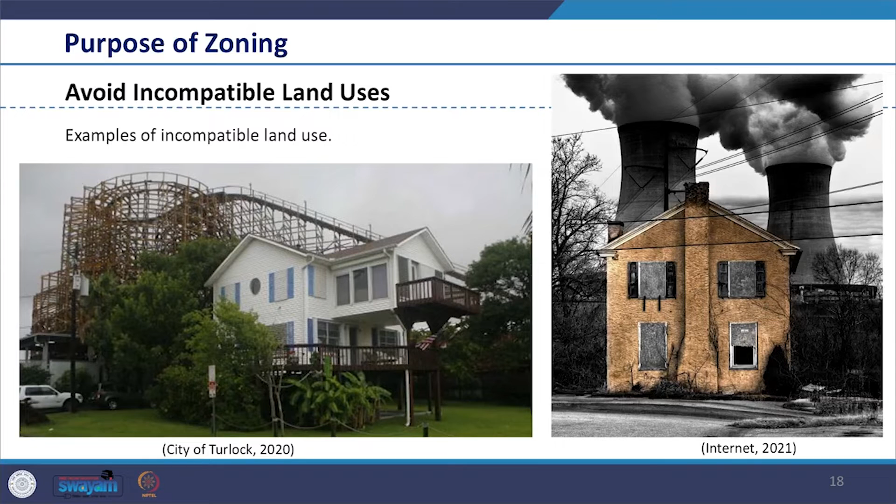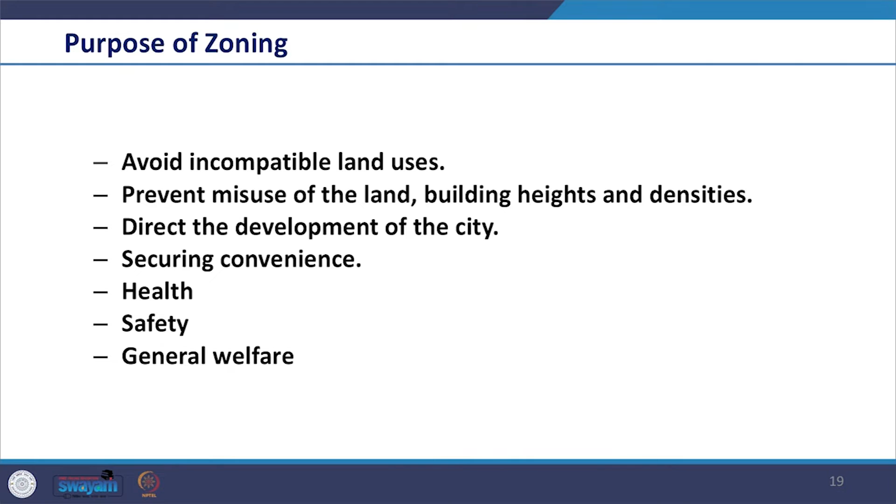Looking at the broader purpose of zoning: it is to avoid incompatible land uses coming together, prevent misuse of the land, determine building heights and density, give direction to the development of the city, and secure convenience, health, safety, and the general welfare of the people.

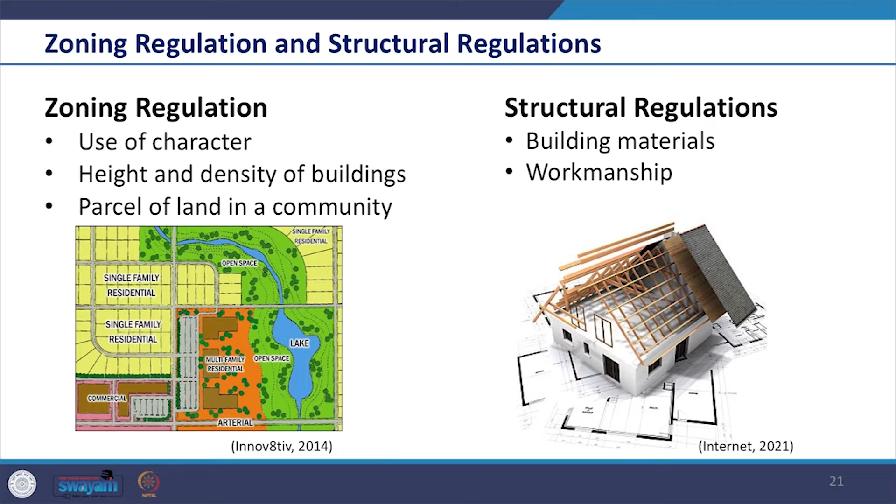Looking at the difference between zoning regulation and structural regulation: zoning regulations are meant for the use, character, height, and density of buildings, and they prescribe how each parcel, meaning the plot of land in a community or city, may be put to use. Whereas structural regulations impose restrictions on the building materials, going further into details into the building materials and workmanship in the form of specifications of the work.

Looking into the power of zoning, how it is executed: zoning power is executed through the process of approval of plans for the proposed use and structure, and by means of site supervision. So that is how, through the approval system and supervision system, we execute our zoning power.

Looking at the aspects of zoning, zoning is related to three main aspects: one is density zoning, height zoning, and the third one being use zoning.

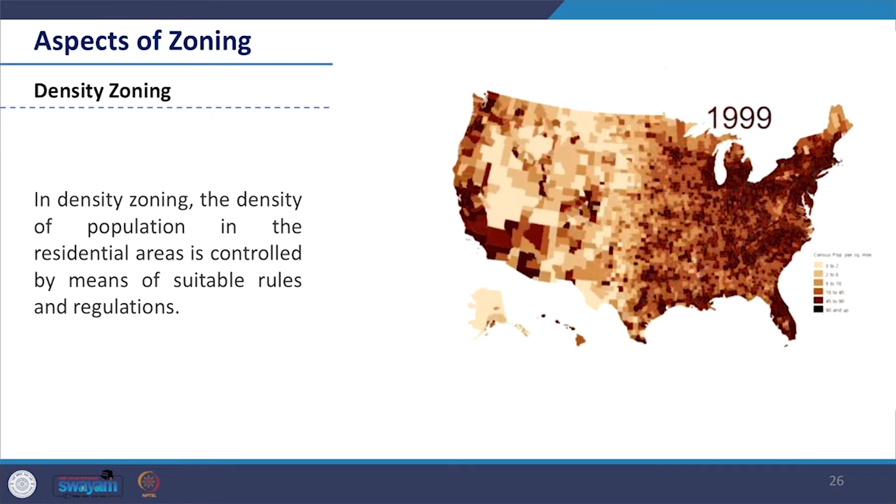In density zoning, the density of population in the residential area is controlled by means of suitable rules and regulations, whereas in height zoning, the aim is at controlling the height of the buildings with due consideration of the content of the buildings and the street width, and the marginal open spaces for the provision of light and ventilation.

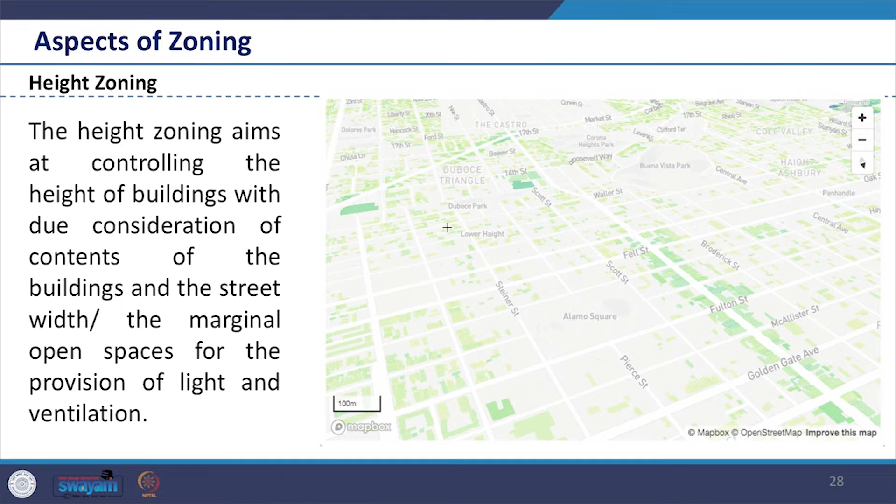Whereas use zoning, which is one of the most important aspects of zoning, it defines the use of various parts of the town, such as whether the use can be residential, commercial, industrial, recreational or special area.

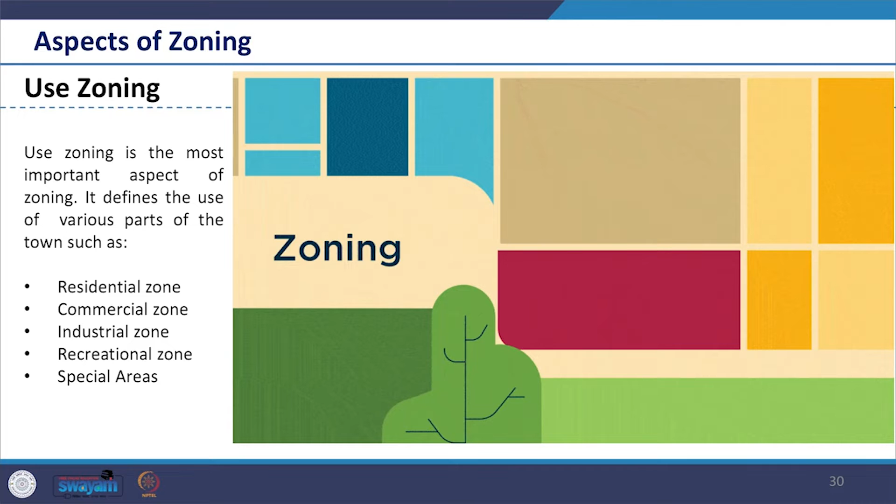So we have seen different aspects of zoning. Now we look at different kinds of zones. Overall, there could be 43 use zones at the development plan level within 10 land use categories at the perspective level. Permissibility could be decided by the town planner depending upon the requirement and feasibility.

So now looking at the principles of zoning. The key principles which need to be considered are: one, to provide functional distribution of work centers and living areas, optimize the travel distance - you see how much we travel these days - and to increase efficient functioning of the activities.

Further, to promote economic development - the whole intention of the urban area is for economic development - for all sectors of the economy by providing more economic space and efficiency. To preserve sensitive areas, at the same time to look after forests, parks, sensitive natural resources, heritage areas and water bodies and so on. Further, to rehabilitate and improve the quality of life for the residents.

So likewise, we also look at securing health and safety by segregating hazardous industrial uses. You may also see this in the example which will follow. Further, to segregate nuisance areas or special uses such as logistics, warehouses, wholesale, airport, etc.

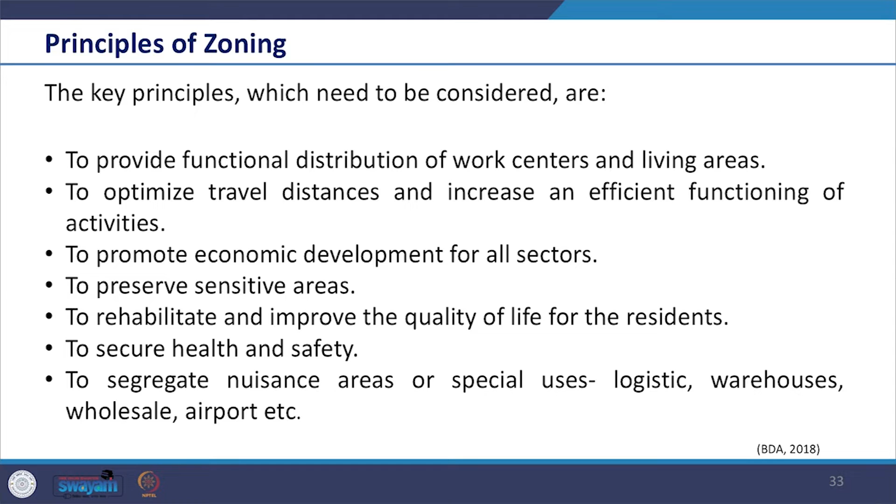So now we're going to look at and try to understand all these things through the case of the Draft Bhopal Development Plan 2031, and we'll particularly look into Volume 3. We will try to understand different zoning aspects and the kind of control exerted through the process and how it guides developments. We have taken this example because you have already seen the analysis as well as the proposal vision of the city, so it will be easier for you to comprehend how we are translating that here.

So just to briefly refresh the problems which we had seen in Bhopal through the draft Bhopal Development Plan - we're not covering all of them, just picking a few - like the challenge of conserving urban forests, water bodies and built heritage, as well as the presence of low density areas, FAR and ground coverage, and the observation about a lot of commercial activities coming into residential areas, and mixed land use activities seen more in the residential area. Likewise, they observed lack of industrial activities, as well as observations about haphazard diversion of land and growth of illegal colonies.

So in order to address many of such kinds of problems, the zoning plan was created in the proposal. In the proposed land use plan of Bhopal city, we see that different use zones are identified. Use zoning is very important as it defines the use to which various parts of the town will be put.

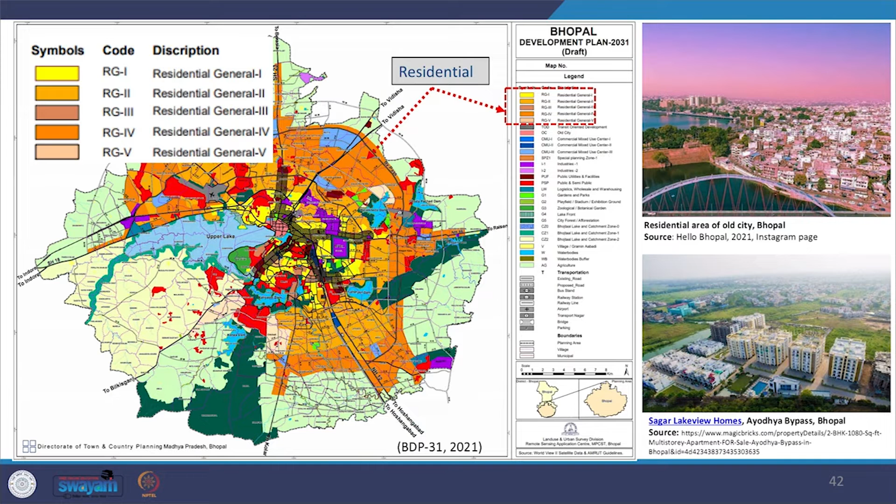Likewise, zone 4 is delineated for the purpose of urban expansion of the city, and zone 5 is delineated for low density, to maintain and preserve the ecologically sensitive ecology of the city of Bhopal. So we see that by use zoning, different conditions and intentions are addressed even within the residential category.

We learned about TOD in our class as an encouraged trend in planning for efficiency and for environmental and economic concern. We see here how TOD is translated into the land use zone. In the map, you can see transit-oriented development, TOD, shown in brown grid along the prime movement corridors.

Transit-oriented development zone is delineated as an overlay along phase 1 of the metro in this particular city. The purpose of the zone is to allow more people to live and work near the metro corridor. This zone is made up of existing older structures which shall be incentivized to redevelop with higher FAR, undertaken preferably through the local area plans.

So you may also integrate, think about the local area plan we studied about. Local area plans will be prepared to ensure that the plot is utilized properly and efficiently through merger or amalgamation, and it addresses the widening of roads, allows parking management, and also allows pedestrianization in this particular zone.

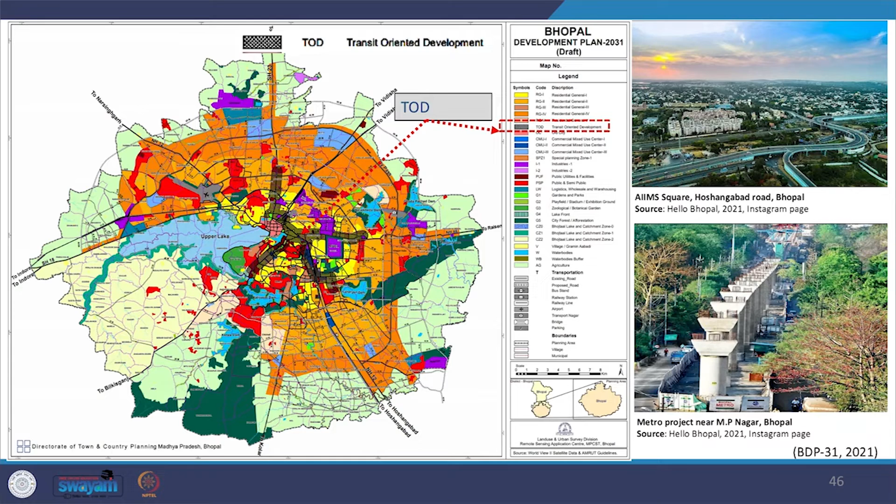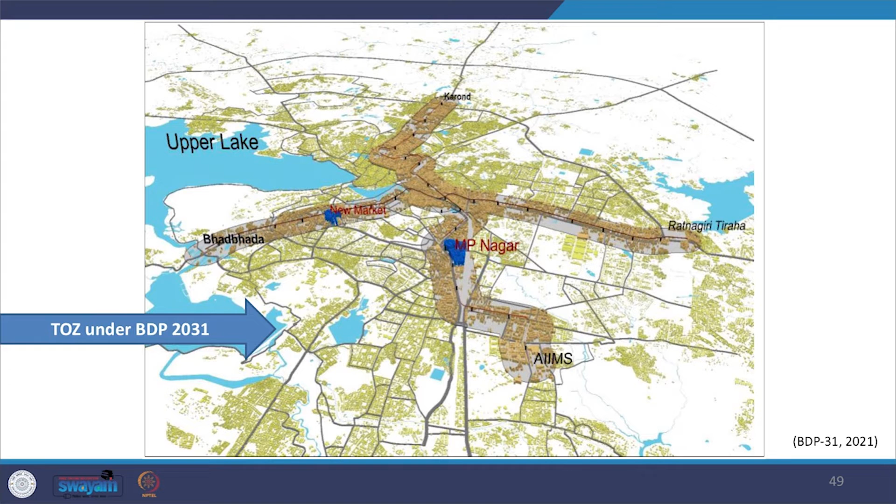The zone has been delineated 500 meters on either side of the metro alignment. Principally, all plots falling completely or partially within this 500-meter buffer from the metro alignment shall be included in TOD. The purpose of this zone is to allow and enable more people to live and work near the metro corridor. So you can see how it has been done here.

In order to promote compact TOD in the city and to integrate land use and transportation interface, this concept is introduced. So the transit-oriented zone is an effective tool to promote compact, transit-oriented development within the walking distance of public transit nodes such as BRTS and MRTS stations.

Sustainable transit-oriented densification is planned to be achieved through TDR. That's the plan proposed by the draft Bhopal Development Plan. The transit-oriented zone is identified as a 500-meter buffer distance on either side of metro line 1 and 2, as you had seen in the map.

It is anticipated that the TOZ, transit-oriented zone, will induce people to prefer to use public transit, providing housing, employment, entertainment, and civic functions within walking distance of the transit nodes. It is anticipated that it will encourage residents and workers to drive their cars less and ride public transit more often.

So we see that Bhopal Development Plan specifies permissible FAR. FAR is a means to control the density. There's also an aspect of density zoning.

Here you can see in the TOZ, higher FAR is being offered, higher than the residential area. So here you see it's 3 FAR permissible, whereas for residential it was 2. You may also reconnect your thoughts to the types and levels of plans.

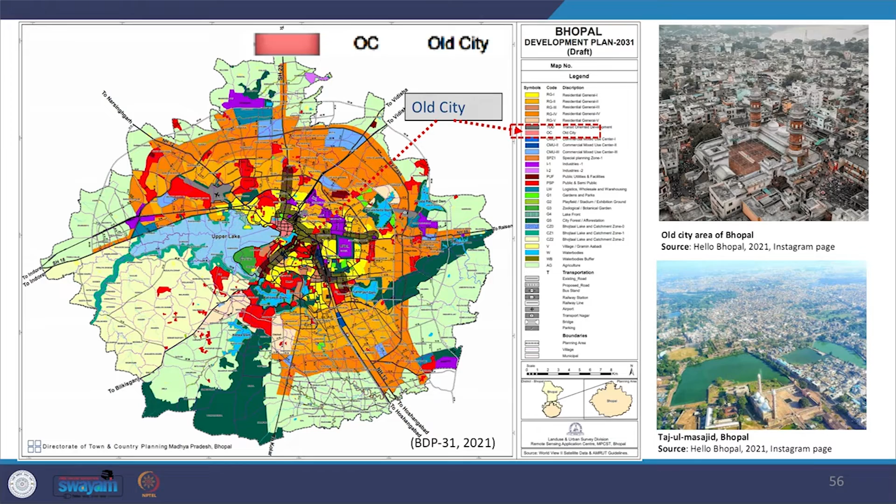This heritage conservation and management plan would also be prepared by the urban local body or any appropriate authority, along with the local communities and relevant heritage committees, to identify heritage structures and heritage precincts as listed by the State Archaeological Department in the Old City Zone.

Based on this management plan prepared by the authority, the plot owners within the zone will be incentivized to undertake preservation and conservation of their heritage properties through receipt of heritage TDR, transferable development rights. Once the heritage conservation and management plan for the zone is prepared and approved by the appropriate authority, the regulations identified in that plan shall prevail over these regulations. So once that heritage plan is there, probably newer regulations would come.

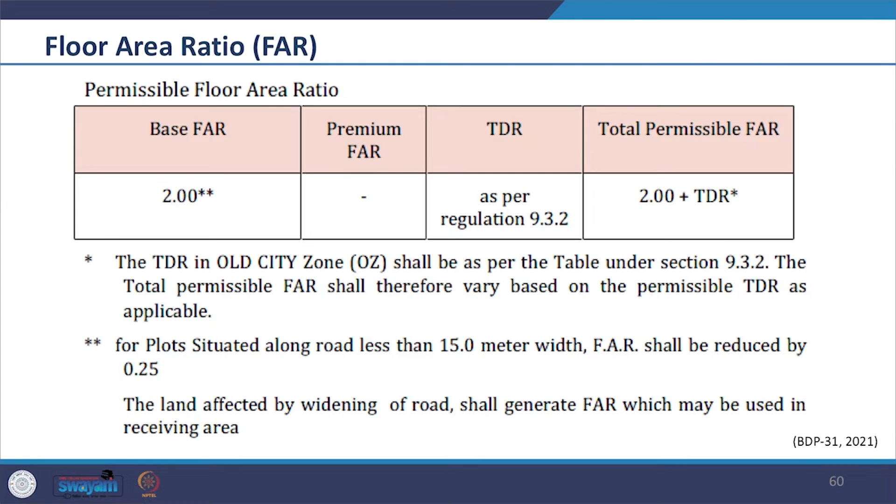You can see the FAR and TDR for the zone in the table given here, which is the total permissible FAR plus the TDR for encouraging the management of heritage structures and precincts. So you see how the cultural or heritage aspect is addressed in a city through zoning. Moving on, we see the next use, commercial mixed use zone.

You can see how it has been distributed across the city to cater to the entire population. In the plan, the authority has divided 3 commercial mixed use zones as zone 1, 2 and 3. The first zone has been delineated envisaging the upgradation of the current commercial center of MP Nagar to a commercially mixed use center.

In this, the target is to provide higher FAR so it can accommodate a larger population. The idea is to transform this place from commercial to mixed use, and higher FAR means increasing the density of the zone.

Likewise, commercial mixed use center 2 has been identified envisaging the upgradation of existing commercial subcity centers like New Market and so on, which will be converted to a commercial mixed use center with higher FAR. Similarly, commercial mixed use center 3 has been identified as a new proposed commercial area under the Bhopal Development Plan 2031. By changing the use zone from commercial to commercial mixed center, they are changing the nature of the place to counter the identified problem, and by altering the FAR, they are going for higher density. You can see the use of the density zoning tool.

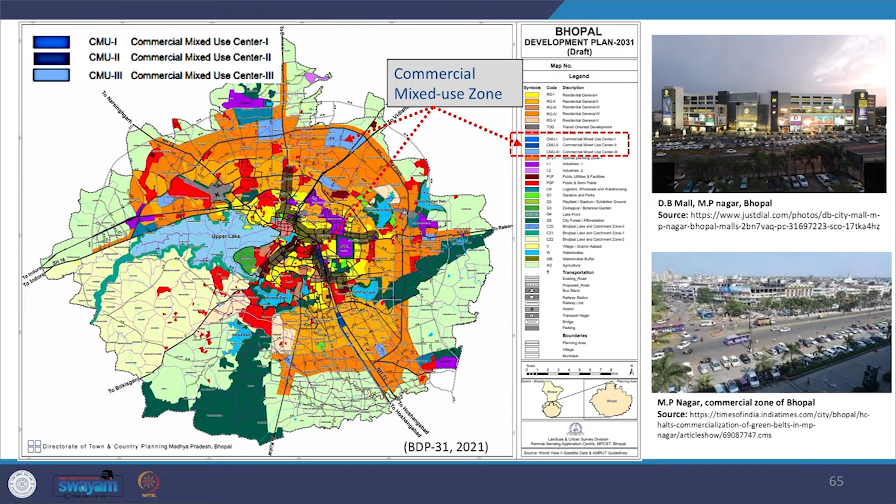Density zoning means the density of population in any area is controlled by means of suitable rules and regulations. Here you can see the FAR in the Bhopal Development Plan. In case of residential, it is 2. In case of TOD area, it is 3. In case of Old City Zone, it is 2 plus TDR, and so on. In commercial mixed use, you can see the range from 3 to 5 FAR.

Further, the municipal corporation would be charging a betterment levy, a one-time payment on mixed land use activities. So you see how resources are mobilized when such services are provided.

The density of population per unit area may be expressed as gross density or net density. Gross density is defined as the average density of population per unit area of the whole residential zone. Net density is defined as the average density of population per unit of the housing area, including local roads only, and excluding open spaces, public institutions, shopping centers and so on.

You may find the detailed formula in the URDPFI guidelines, point 7.3.3, page 236, provided here for your reference, for both residential and non-residential areas. So you have seen, partly, how density zoning control is used.

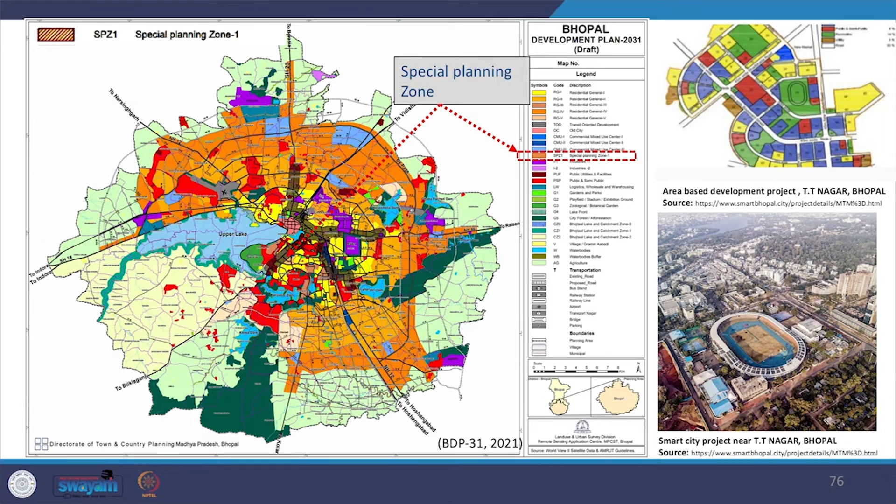Moving further, we see another kind of use zone, which is industrial. The industrial zone has been delineated to identify areas where large, medium and small scale industrial activities are either currently located or proposed to be developed in future, for the purpose of promoting the secondary sector economy in the region.

You further see that industrial zone 2, or I2, is there. This zone has been delineated to identify all industrial areas where the current permissible activities are unfit for human habitation. The purpose of this zone is to ensure that non-compatible activities, such as residential areas, are not allowed to be made permissible in close proximity, so they have been placed farther ahead.

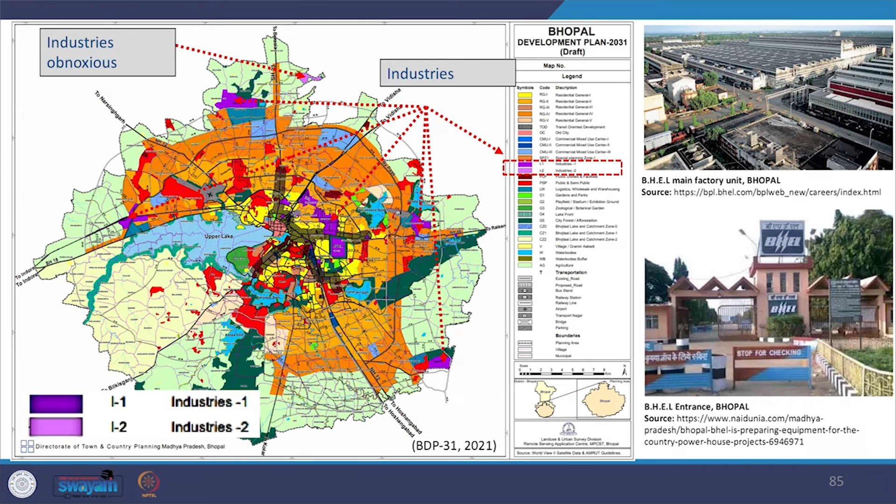So you see here how use zoning is done for economic purposes as well as for environmental safety. You can see how obnoxious industries are located at the extreme end of the city, taking care of wind direction and away from the residential area, located in the agriculture zone with a buffer area. You may also recollect the gas tragedy of 1984 experienced by the city, and the loss of life.

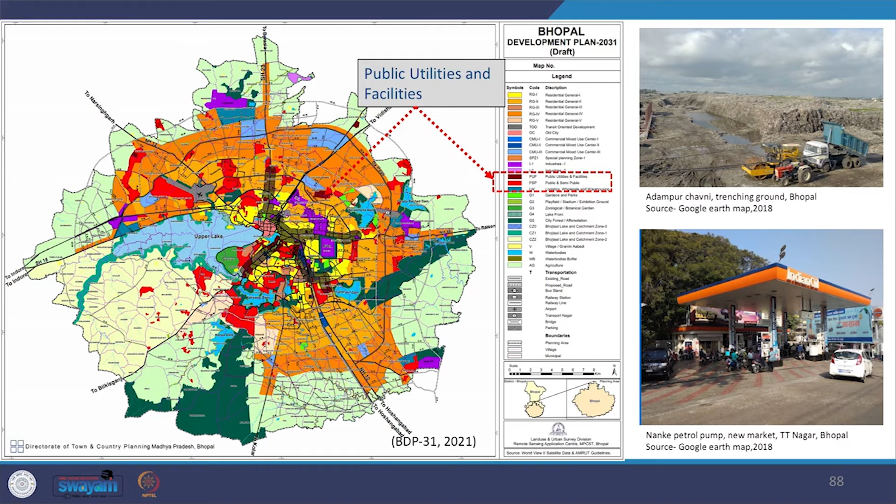One reason being the location and the wind direction. Moving on, we see another kind of zone, which is the public utility and facilities zone. This zone has been identified for provision of key infrastructure in the Bhopal planning area, and you can see how it has been uniformly distributed to cater to the entire city population. We also see the public and semi-public zone, marked in red, identified for large-scale institutional, administrative, educational, health and social-cultural activities within the Bhopal planning area.

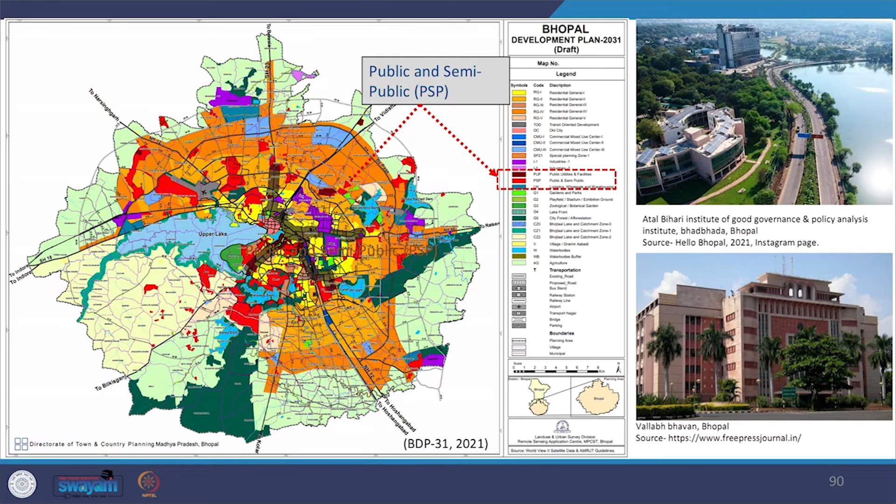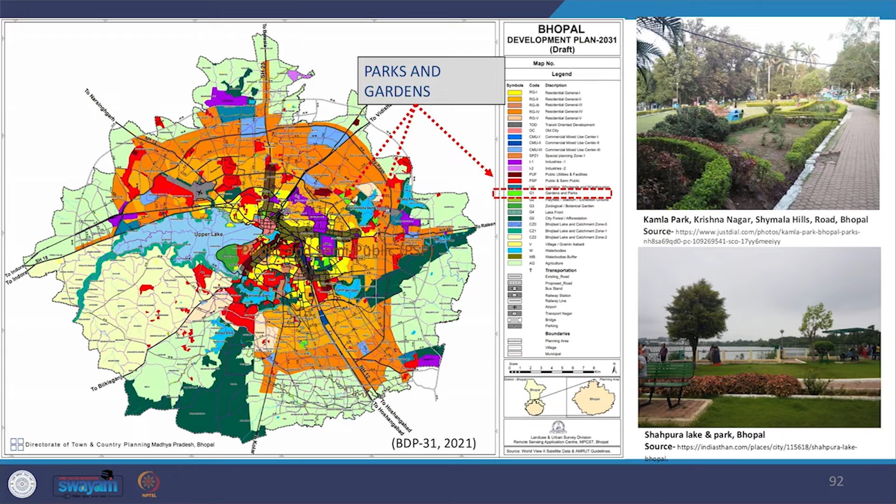Further, we see parks and gardens zone has been created, G1. This zone is delineated to incorporate various levels of existing land and proposed major green areas, including parks at the city level, regional level and district level in the planning area of the city.

Moreover, you also see play field, stadium, open exhibition zones, and zoological botanical gardens as a G3 zone. This has been delineated to incorporate all existing zoological botanical garden premises in the Bhopal planning area. Activities as per the guidelines of the Environmental Ministry of Government of India shall be permissible in these zones.

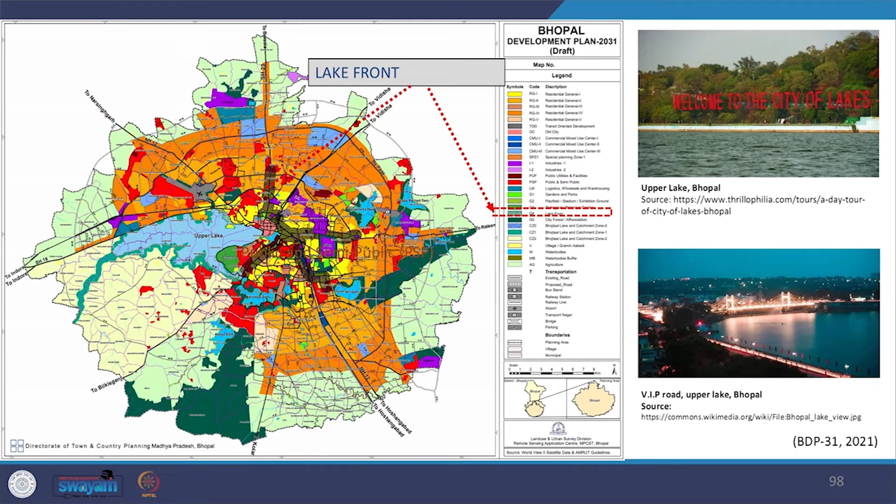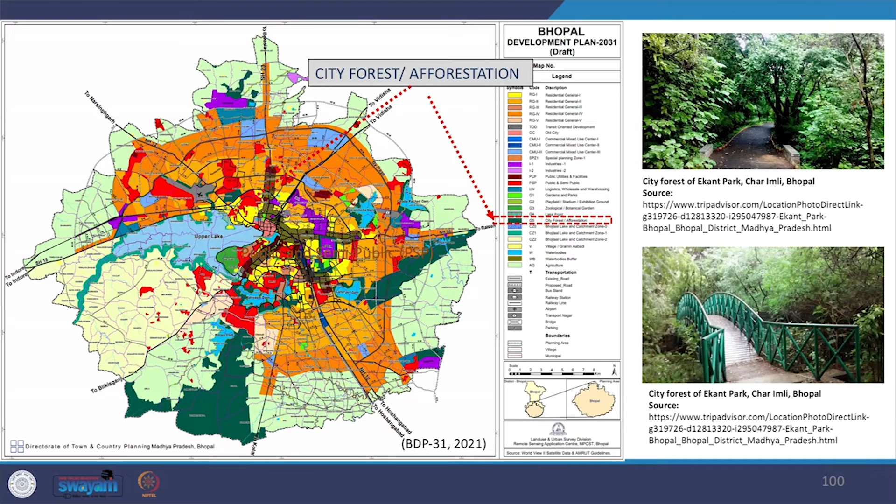We also see lakefront. This zone has been identified to delineate all existing areas where lakefront development was undertaken within Bhopal planning area. We also see the city forest, which has been delineated to secure high intensity vegetation across the city. You also see how the topography aspect and environmental considerations are addressed through the use zoning here.

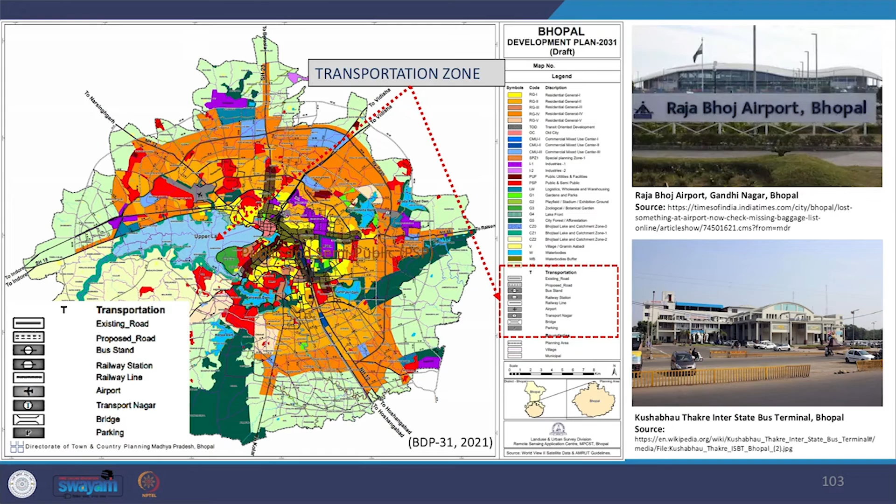Now moving forward, we also see transportation zone. The major transportation elements of the city have been identified under this zone, including airport, railways, cargo, bus terminal and stand, bus stop, transport nagar, metro roads, depot and multi-level parking and so on. You can see here how city and regional level infrastructures are taken care of through use zoning in this case.

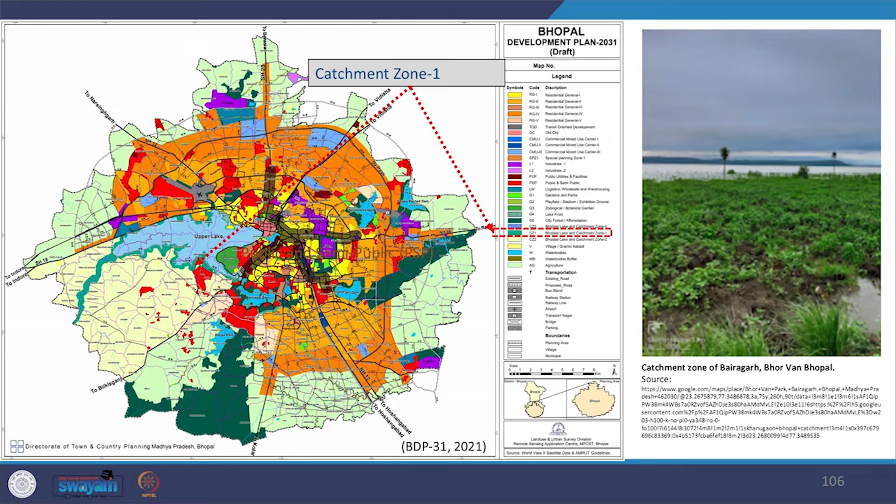So Bhojtal Lake and Catchment Zone 2, CZ2, this zone constitutes all catchment areas beyond the catchment zone 1 buffer, except the villages and their extension areas in the Bhojtal Lake. This zone has been delineated to regulate eco-sensitive development for promotion of tourism and allied activities in the Bhojtal Lake catchment. Further, we see water bodies buffer.

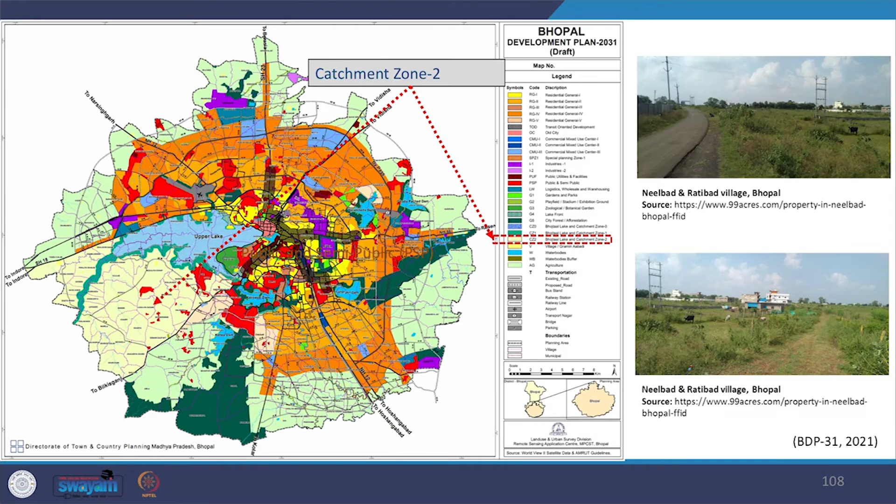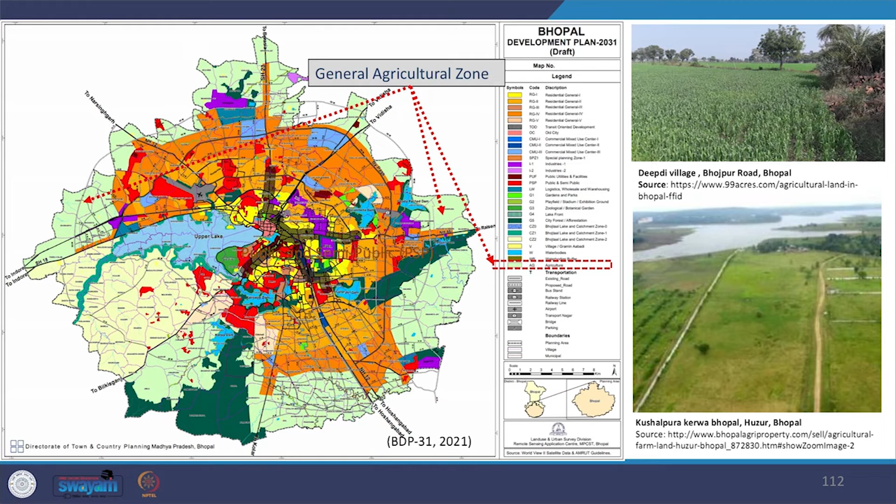Further, we also see that there is a general agriculture zone. This zone identifies the primary agriculture areas with supporting activities in the peri-urban areas of Bhopal planning area. You can see this all around the periphery. We further see how the entire ecology has been addressed through the use zoning here again, so we see how the water, the green, everything has been addressed here through zoning.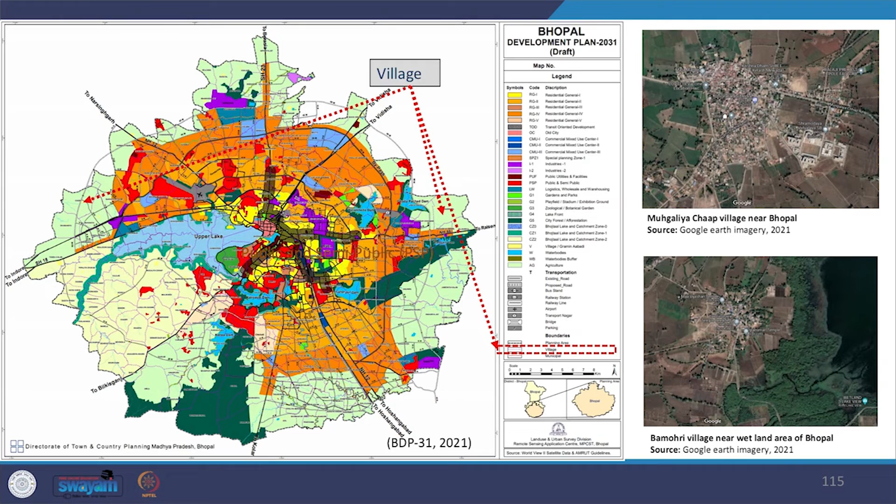We further see village areas have also been identified here so as to enable villages to exist without losing their organic and traditional form and character. So we see the village extension zones 1 and 2. Also, you see how distinct character of the villages is retained in the city. You may also revisit the city vision, what their vision was and how it translates here.

So we have covered all the different use zones as well as density zoning to a certain extent, which restricts what use will come in which areas, to provide functional distribution of work centers and living areas, optimize the travel distance, and make efficient use of resources and allow efficient functioning of activities through use of TOD. Then it has also looked into how to promote economic development of all sectors of economy by providing more economic space - you saw the industrial space, commercial space coming in here.

Then you also looked into how they did zoning to preserve sensitive areas like forests, water bodies, parks, and other green areas you saw here. Further, you saw how they have made provision for rehabilitation and improvement of the quality of life for the residents. Likewise, you also saw how it takes care of the health and safety of people by segregating hazardous industrial uses, and keeping all the problematic areas away from the residential zones. So this was about use zoning.

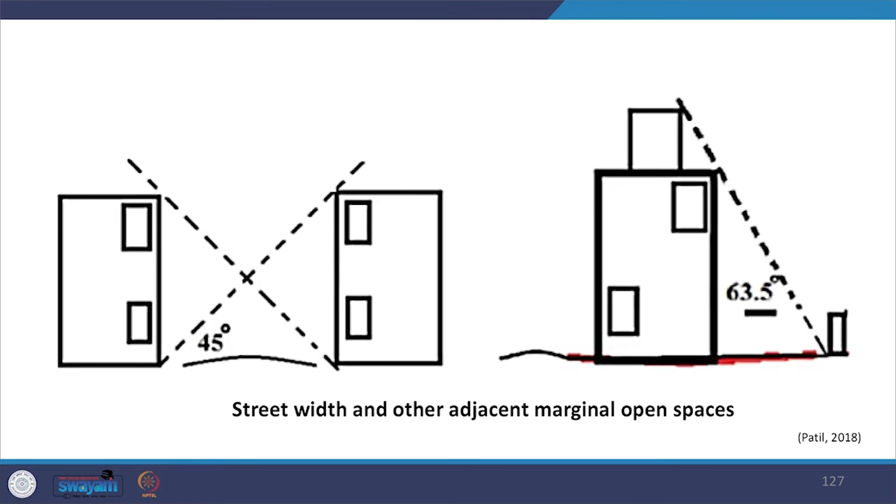As you can see in the image here, the height zoning restriction depends on nature of building, type of zone and climatic conditions. The advantage of height zoning is that it controls the development of the central business area of the cities and thereby assists in solving problems associated with heavy concentration of traffic and so on.

It provides aesthetics, which we had already seen. It prevents monopoly of light and ventilation, and it regulates land values. The most important aspect is that health and traffic movement are regulated by height zoning.

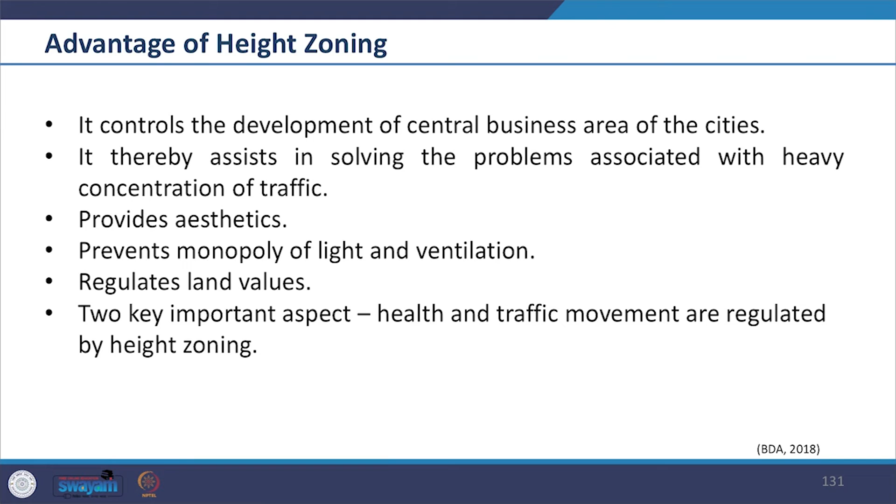We will further see through an example how density zoning is achieved through regulating marginal open space. We will look at the residential general category use from the Bhopal Development Plan.

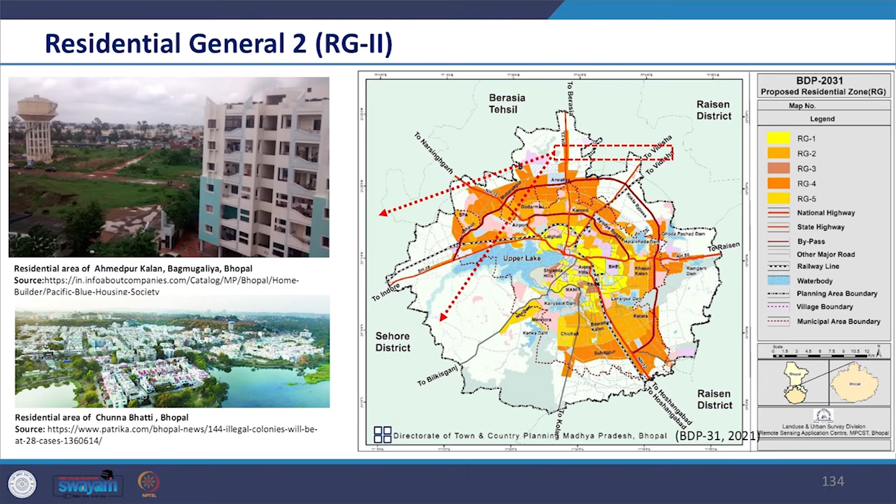Residential General 2 is envisaged primarily as a residential zone with mixed use permissible based on specific conditions. This zone is primarily made of existing older structures, as you have already seen before. The purpose of this zone is to allow urban regeneration while maintaining the overall urban character of the area.

Here you see that the permissible activities have been defined. The activities which are permissible in this zone are residential, commercial, institutional, recreational, industrial and logistic activities, as well as transportation activity.

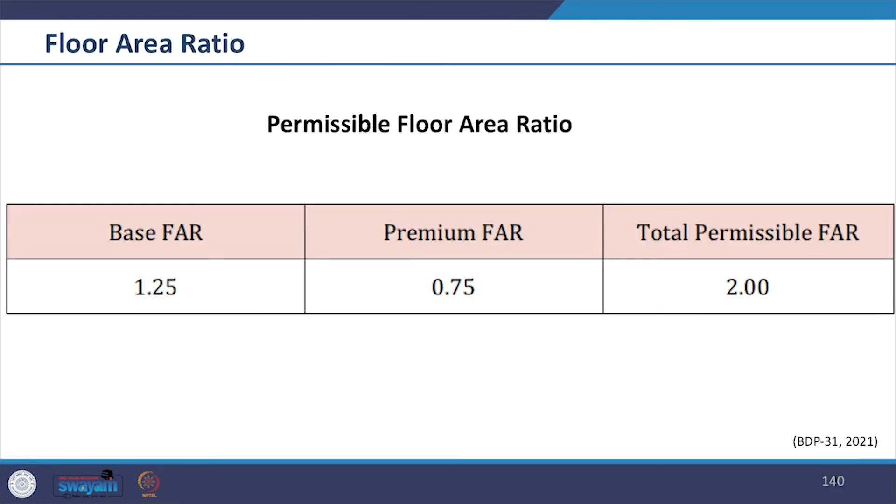You may see here in the table permissible use along roads which are 12 meter and above width. You can also see the FAR specified in this particular zone.

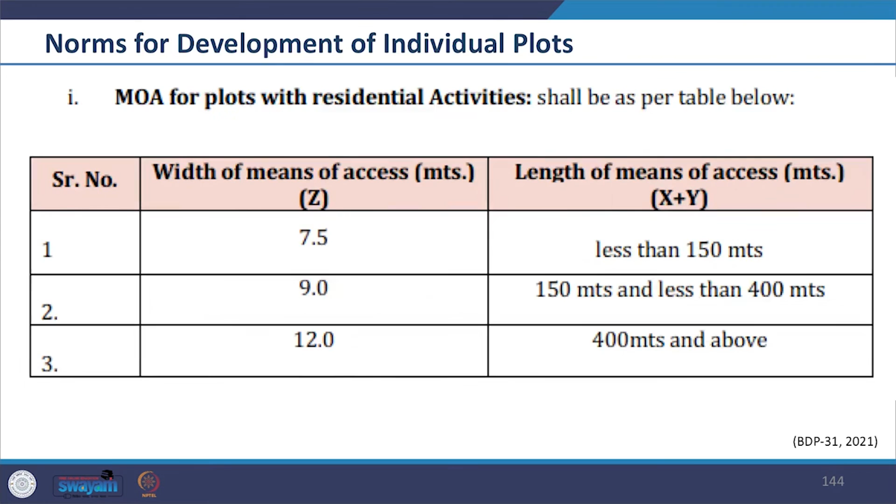Further, you can see the norms for development of individual plots, such as minimum plot size for different development types. You can also see details of means of access.

Likewise, you can see marginal open space, such as the front road side margin, side and rear margins, minimum distance between two buildings on the same plot, permissible activities in MOS to facilitate common open space, electrical infrastructure, pedestrian, parking, and so on.

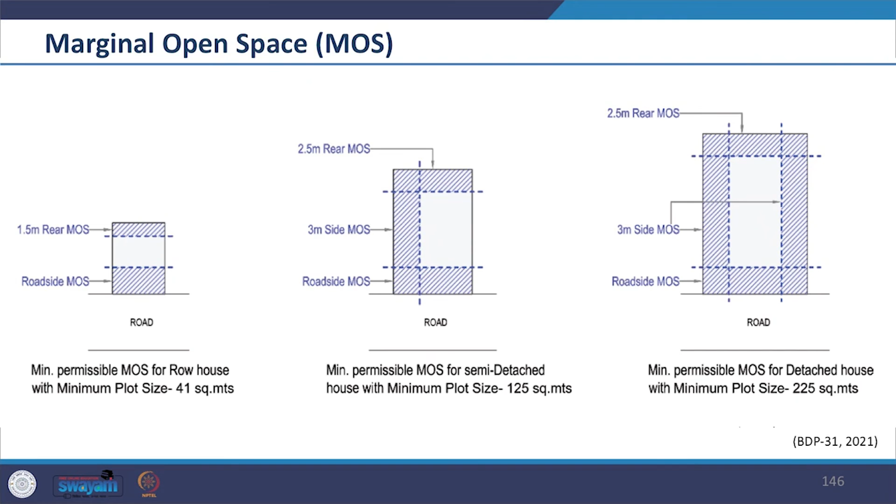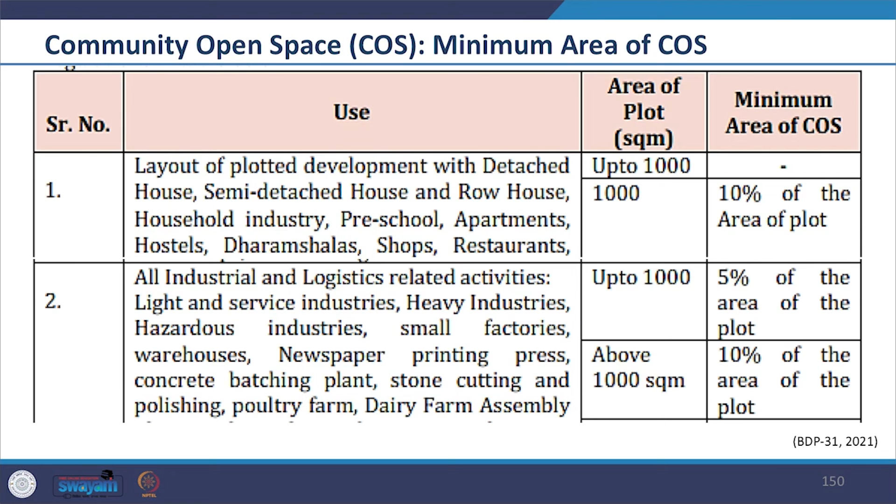So we saw that zoning is one of the important planning tools to manage growth, regulate density, and organize land uses within the urban area. By regulating land uses, it helps to segregate incompatible uses, increase livability, and create desirable character for different areas of the city. Zoning combined with development regulations determines the supply of developable land and built-up space in various zones.

Then we see that zoning requires regulations and rules to avoid any developmental violation. So we saw all these things, plus how we are looking at controlling as well as creating flexibility at the same time, ensuring that it is not exclusionary.

So summarizing today what we have covered: we looked into the meaning of the term zoning, we reviewed the purpose of zoning, we also looked at the difference between zoning regulation and structural regulation. We discussed and listed different aspects of zoning, and then we looked into detail through the case study.

We listed and identified land use zones through the help of the case study here as well. We discussed the principles of zoning, and the core purpose behind it. Through the entire session, we reviewed the case study of the draft Bhopal Development Plan and saw the overall relevance of the tool with its ground translation.